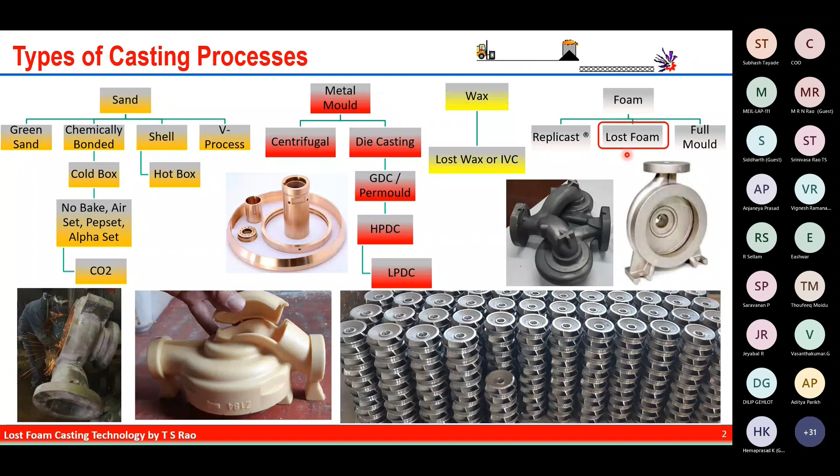Moving on to the introduction to lost foam. Actually, if you all know the investment casting process, in lost foam, the wax is replaced by the foam - that is the major difference between investment casting and lost foam technology. But one difference is in lost wax, the wax is drained and recycled, whereas the foam is evaporated. The metal in, foam out. There is a major difference between lost wax and lost foam.

It started in 1956, but in India it is early 2000s. It entered India, and there are a couple of very good foundries in India. Some of the foundries are doing very well, and they are global leaders today. These are the major steps of the lost foam casting process. The first one is the product design to the process. This is very, very important.

Unless we design the product to the process, we will not be able to achieve the desired results out of this process. Next step is the tool design and tool manufacturing, which is different from the conventional sand casting process. Third one is the casting process, tool design and manufacturing.

There are three major areas, called white area, yellow area, and black area. These are the three areas. Black area is nothing but what we have in any other foundry, but the other two are very significant to the lost foam casting process. You can see a cylinder block, a foam, and the part, which is exactly the replica.

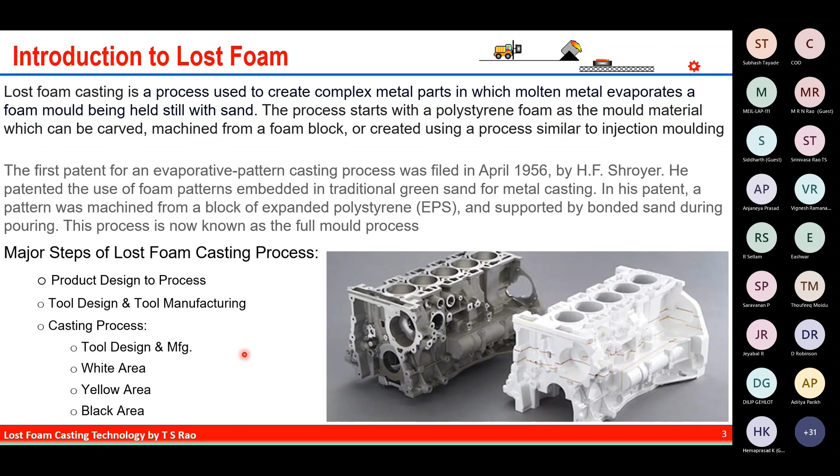Moving on to the next slide, there are various advantages of the lost foam casting process. First is the design freedom for complex multiple parts. If 2-3 parts are made today in any other casting manufacturing process, assembled after machining into sub-assemblies, those complex sub-assemblies can be made as one single casting.

No draft angles are required in this process. No multiple tools required like any other casting process - you see patterns, core boxes, breaker cores, many components. Here, only one tool is required, which is the foam mold. And there's gating flexibility - gating can be connected at the top, side, bottom, or at the center, wherever there is accessibility.

In this process, we can save cost because 100% of sand can be recycled after cooling. No resins or chemicals are required in this process. Lower tool cost because we don't have to make patterns and core boxes separately - there is only one tool required.

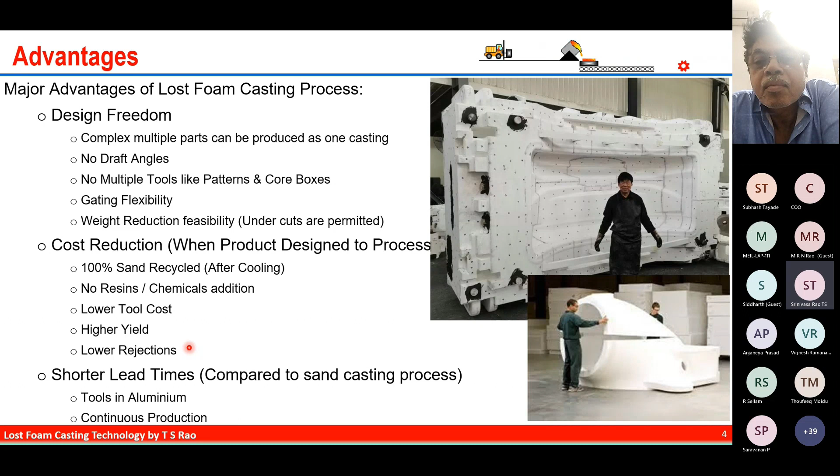Higher yield because gating can be connected at every part of the foam mold. Because of this, we get higher yield and lower rejections, because we see the replica of the casting before making it. Lead times are shorter because the tools are made in aluminum - scooping aluminum is easier than steel and iron, and continuous production can be made.

Moving on to the next slide, we can make a near net shape with weight reduction possible. We can make parts as thin as 2.5 millimeter wall thickness. We can eliminate machining wherever the tolerance is within 0.5 millimeter.

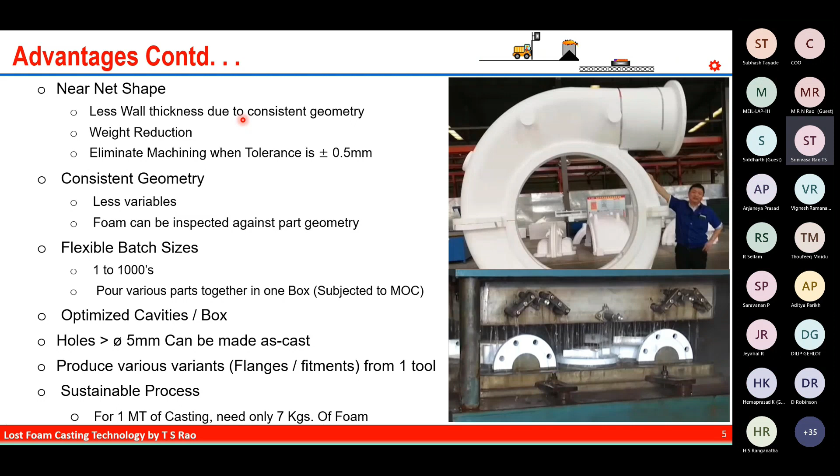The geometry is going to be very consistent, with very few variables, because all the variables we see in the casting can be seen in the foam. The foam can be corrected before we make the actual casting. The foam can even be inspected - we can take a scale and inspect it, or it can be done by CMM. Everything can be inspected before pouring.

Flexible batch sizes - we can make either one piece or we can make thousands. And various parts can be made together - in one particular mold, we can pour many parts together, subject to the material of construction being the same. Like one pump body, one pump housing, one impeller, everything can be poured together in one mold box. That is the beauty of the system.

Optimized cavities per box - as we know, it is like an investment casting tree. We can connect any number of cavities subject to the mold box size. Any casting hole over 5 millimeter diameter can be made as cast. If you see the holes in the flange in this picture, normally in conventional casting we are expected to drill these holes. The beauty of lost foam technology is everything is made as cast - even the 5mm hole can be made as cast.

We can produce various variants - normally in a pump housing there are various flanges, PN16, PN25, ANSI 125, ANSI 250. In that case, the flanges are made separately and glued. One flange variant is glued to the body, another flange variant can be glued to the same body, so that we can produce both variants together, whereby even the tool cost can be optimized.

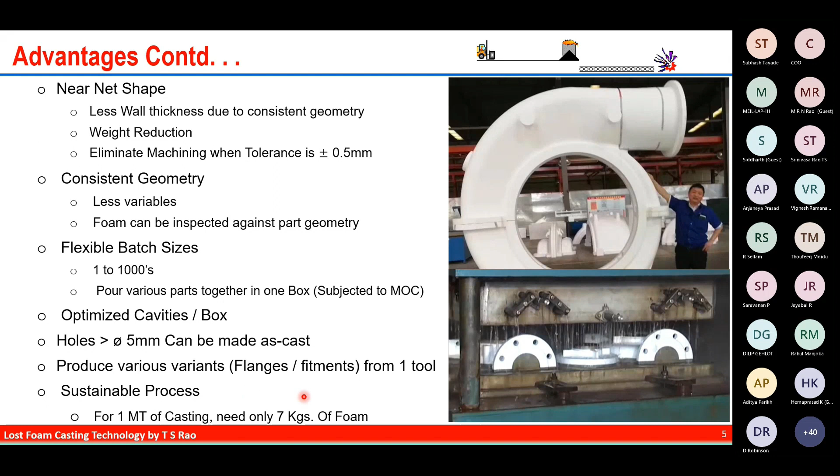It is a sustainable process with respect to the environment. And this is the beauty of the whole lost foam technology - for producing 1 metric ton of casting, we need only 7 kilograms of foam, whereas to produce an investment casting, we need a 1:1 ratio - for production of 1 metric ton of casting, we need 1 metric ton of wax. That is the delta in the lost foam casting technology.

Moving on to the next slide, the quality is going to be certainly much higher than any other casting process, because we don't use chemicals - no chemicals means no gas defects, no blowholes, no gas.

It is going to be a unique selling point. We can be a global leader if we have this technology. Tools can be transferred from other regions. Like customers say, I have a tool made suitable for lost foam technology, which is in China. I don't want to invest in a tool again. Would you like to take the tool from China and start production? So if we have the capability, we can get the tool and start production.

Unlimited tool life, unlike the sand casting process where we have a limited life, here a few million, because there is no wear and tear, there is no abrasiveness in the foam beads.

One foam, multiple metal constructions. When the foam is made for one particular product, like gray iron, where the contraction is 1%, suppose you want to make the same product in ductile iron, where the contraction allowance is 0.5%, if we know in advance what are all the various materials we are going to produce from the foam, we can have an intermediate contraction allowance, which is 0.75. Even some foundries make steel as well, and steel needs over 2% contraction. Only during the tool design stage should we know what materials we are going to cast from the same molds, the foams. That is the advantage of this process.

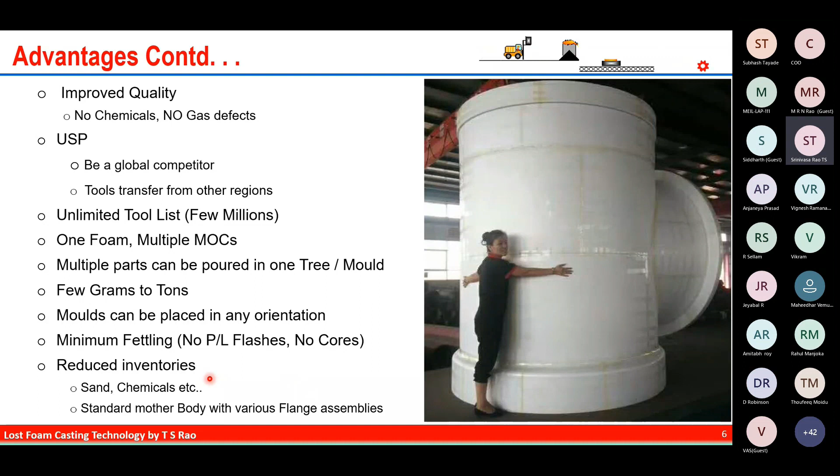Moving on to the major steps, as I explained previously, we have 3 major steps. It is called white side, which includes foam molding and gluing, and yellow side, which includes coating and drying. Black side includes molding, pouring, and post-pouring process. You can see the weight, suppose if you see the girl holding the foam, if it is a casting, it weighs not less than 500 kilograms. So that is the beauty of the system.

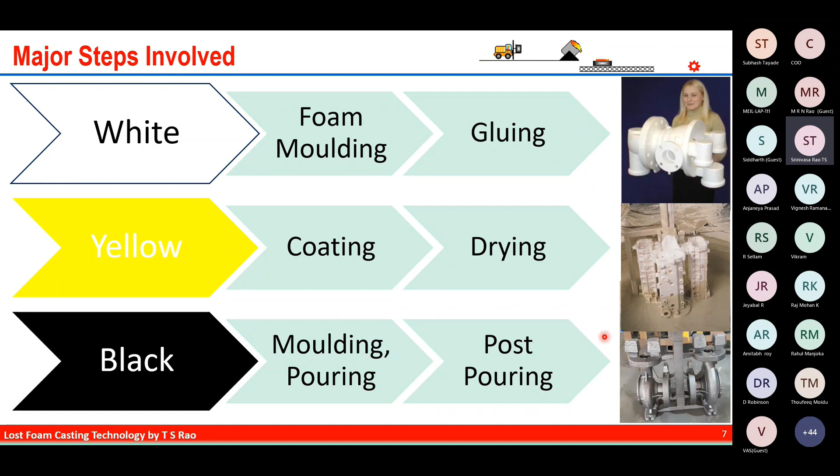Next is the dipping process and post-pouring. Post-pouring process is similar to any other casting manufacturing process.

First, start with the tool design. The tool design is very, very important in this process. There are 2 significant processes in the tool design: one is vertically parted molding machines, another is horizontally parted molding machines. I am illustrating the vertical molding machines. Tool design for lost foam is different from the conventional sand casting process. Here we need a complete shift in understanding the entire process. The tool design is similar to investment casting process, only wax replaced with foam. The tool is negative to produce a positive profile, that is why the outcome of the molding looks like a casting.

Tool design parameters: the material of construction, mostly aluminum. The tool shrinkage allowance is 0.2%. Material shrinkage, whatever various materials you intend to pour from the same foam, that shrinkage allowance also needs to be applied on the tool design. No undercuts in the tool. If undercuts are unavoidable, we need to introduce loose pieces, and slicing to be done to ensure there are no undercuts, and offset parting lines. There are punch prints, which are the locators between the fixed half and movable half, and vacuum and steam venting to be provided to the tool. Foam injection locations, water spray nozzles, uniform wall thickness for uniform heating and cooling. The tool is expected to have uniform wall thickness, unlike any other processes.

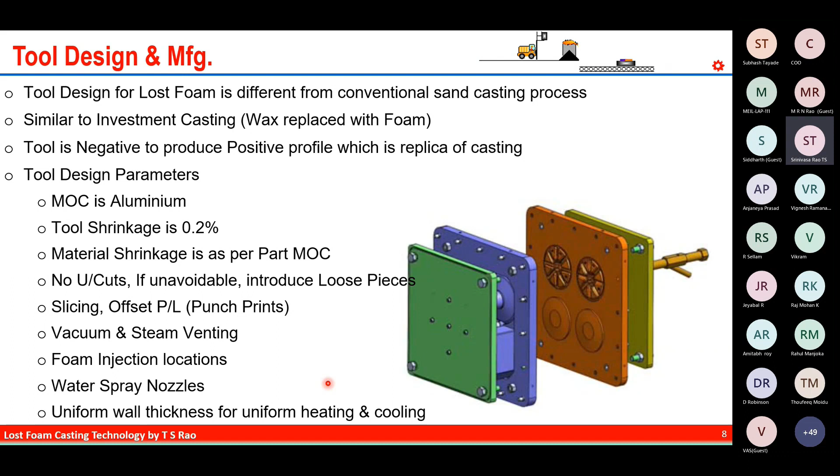Moving to the next slide, this is only for reference. Suppose you take a small pump body, it is sliced into two, slice 1 and slice 2. When you make two slices, you can closely see there is a male projection and female for locating the foams at the exact orientation, and you can see the uniform wall thickness of the tool. We have various parts in the tool, like this is a fixed half, this is a movable half, and they are locating pins and bushes. There is an insert, there is a part cavity within this. In the tool, you can have multiple cavities, different products as well.

These are the vents which are inserted mainly for passing the steam and the water. They are physical vents and they are micro vents. And you can see the gasket groove to avoid bead leakage from the parting line.

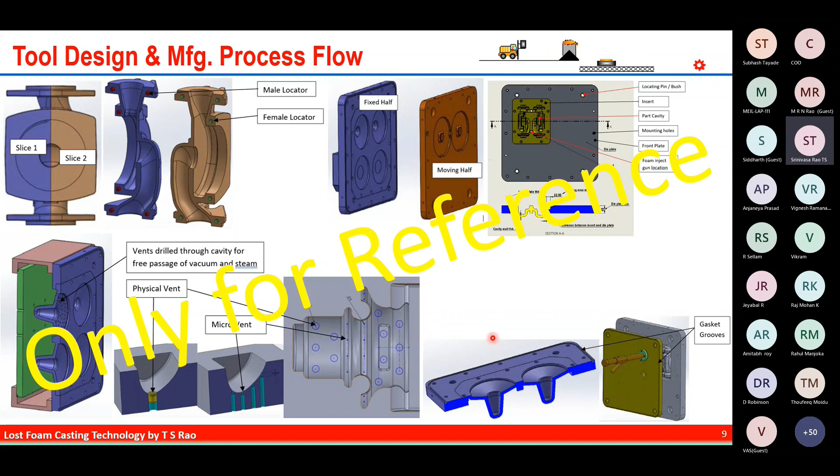Moving on to the next slide, we have pins and bushes. There is a back plate next to the tool, and this is a shooting gun which is connected, protruding towards the casting cavity. This is the design of the shooting gun. Again, it is sealed to ensure that no foam beads or steam is leaking from here.

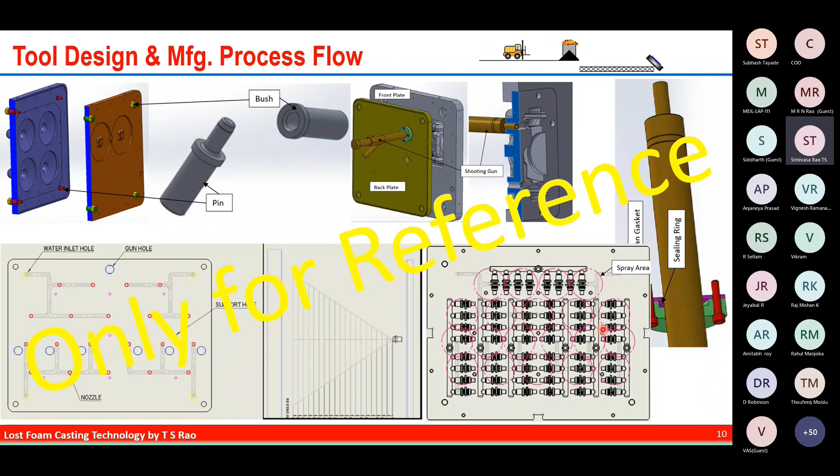This is a water inlet diagram, and if you go to the side view, you can see how water is sprayed, and this is the area. So we need to cover the entire foam cavity surface, so that is how the water injection is to be designed.

This is a typical spray nozzle, again customized to the casting cavity. This is called a steam chest, also a bolster. It will have various openings, one for the water, one for the steam, and one for the water and steam outlet. There are locating pins for fixing the tool, and again there are gaskets to prevent leakages. This is the exploded view of the entire tool.

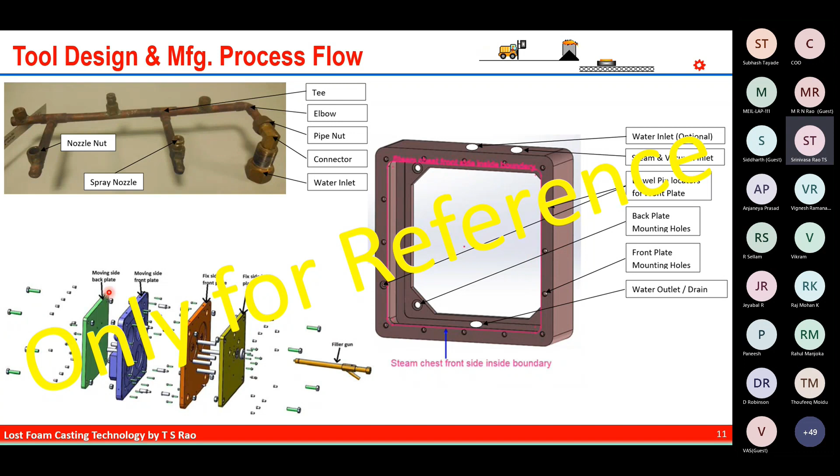Moving on to a further exploded view, two halves of the mold supported by back plates. The entire assembly is again assembled into this chest or bolster.

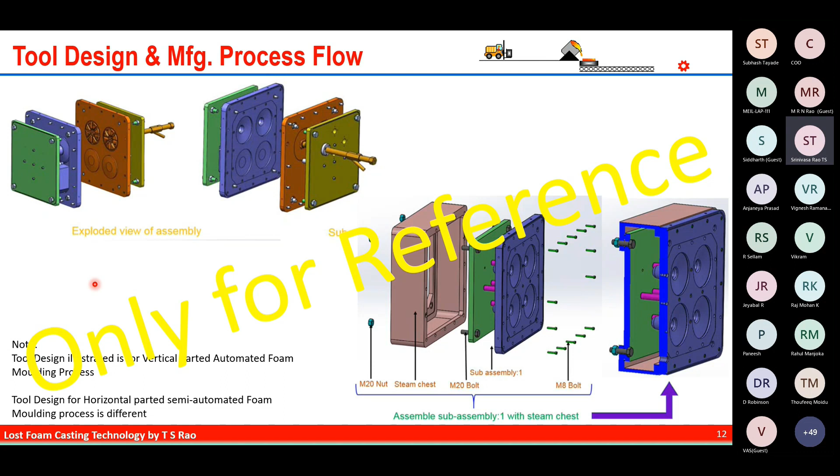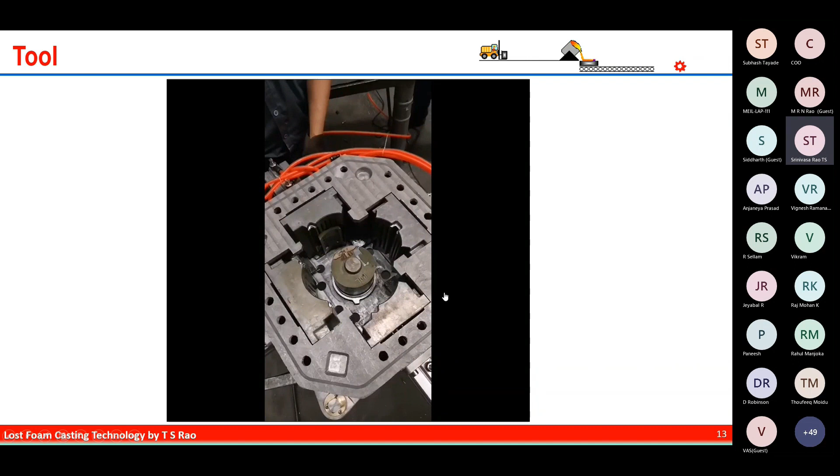As I said earlier, this is a vertical automated foam molding machine tool design, and the tool design for the horizontal is going to be different than this design. This is only for reference. Wherever there is an undercut, we can use loose pieces. And this is the simulation process.

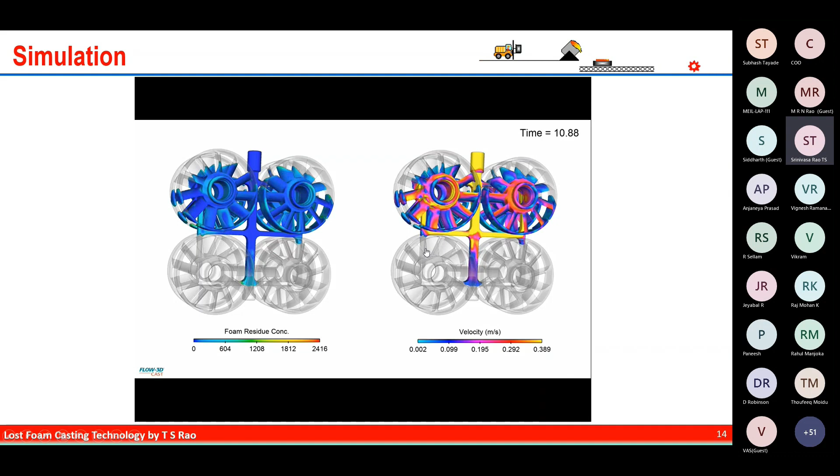I've taken Flow 3D as an example because Flow 3D did extensive research at the University of Alabama in lost foam technology. Today they seem to be the leaders in simulation for this process. So we can exactly see foam residue concentration and velocity in this process.

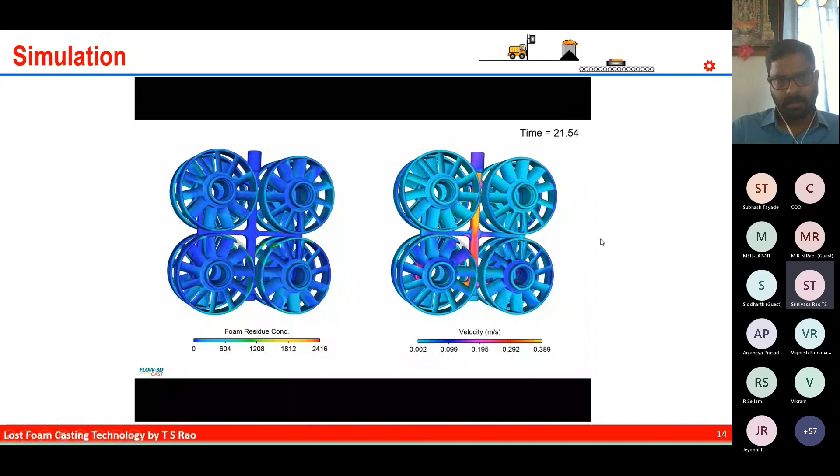The next one is the white area. White area is nothing but what looks white, the foam beads preparation. There are two significant foam beads available in the market today. The first one is EPS. The diameter of EPS varies from 0.18 to 0.8 millimeter. The carbon will be over 0.1%. It is suitable for gray iron, copper, and aluminum alloys.

Similarly, STMMA, the size is a little larger and carbon is as low as 0.06. It is suitable for ductile iron and steel. Steel again is not stainless steel, because stainless steel is sensitive to carbon. We can make carbon steels in this process.

The bead selection normally depends on the material of construction of the part. Generally 0.2 mm is used, which is like if you take a 1 liter jar, the beads weigh about 18 to 20 grams. The thumb rule is the bead size should be 1/10 of the casting wall thickness. If the wall thickness is 2 millimeters, then the bead size should be 1/10, which is 0.2 millimeter. So that is the thumb rule.

Once the beads are selected, the next process is called pre-expansion or steaming process, where the beads are taken into a boiler, a steam boiler, and steam is pumped for pre-expanding the foam beads at half bar pressure at 100 degrees centigrade. A few electrical options are also available today in the market. The bead size will increase to about 0.6. When you take 0.2 as the initial bead, after pre-expansion or steaming, the size goes to 0.6 millimeter. The cycle time again depends on the bead's quality requirement; it will vary from 8 to 15 minutes.

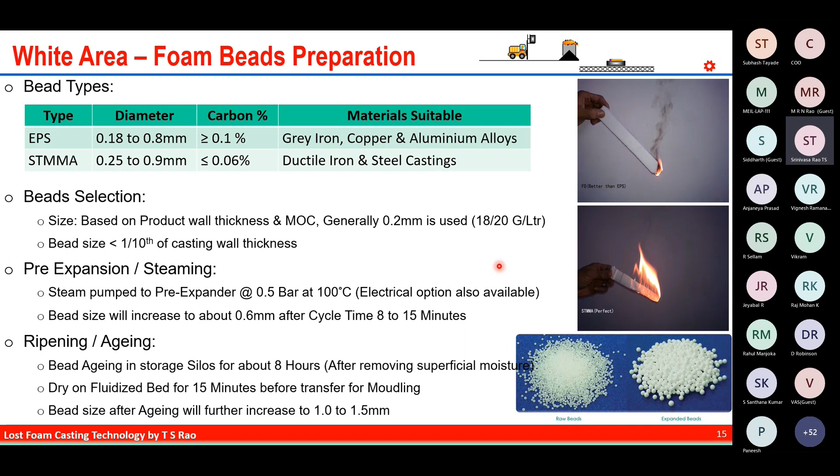The next process is foam molding. The pre-expanded foam beads are injected into the tool cavity. Once the foam beads are fully injected into the tool cavity, we need to pump steam into the tool at half bar pressure for 2 to 6 minutes, depending on the part geometry. Once steaming is over, we need to inject cold water at 1 bar pressure for 2 to 6 minutes, again depending on the part geometry.

This cold water has two advantages: one is to bring the tool back to ambient temperature, and second is promoting foam pattern ejection from the tool. After the cold water is pumped, the foam patterns are ejected from the tool, then collected by hand. Then the tool is cleaned with compressed air for the next cycle.

The wet foams are dried in a controlled environment to remove moisture. Normally the foundry has dry rooms with humidity control, ensuring the foams are completely dried before moving to the next process.

After foam molding, the next process is foam assembly. The foam patterns are assembled together to form a full pattern using glue. There are two glue options: hot glue and cold glue, both available in the market. Gluing can be done by hand, by brush, or by gluing machines.

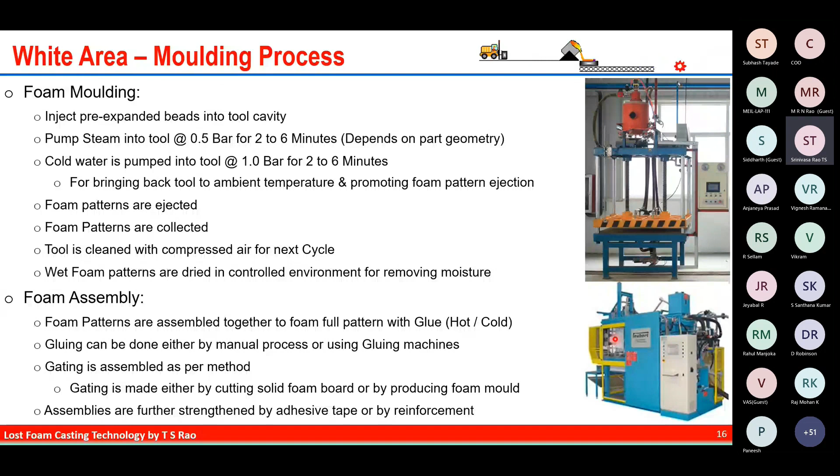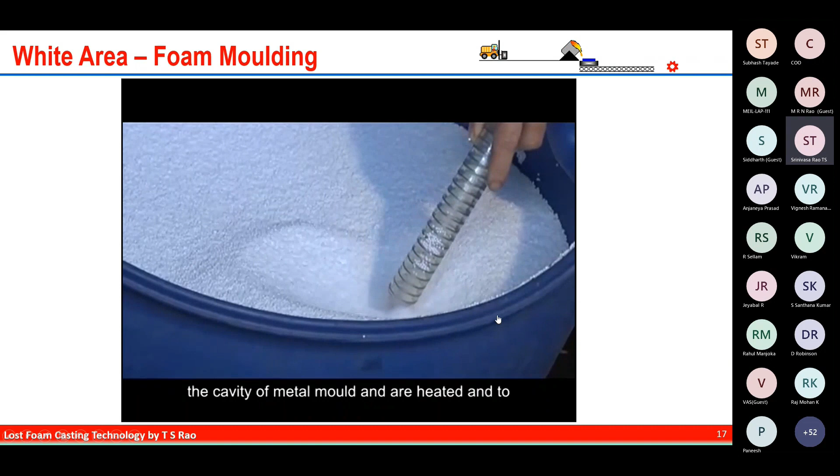Moving on to the next slide, I have a small video on foam molding. The bead will be heated and expanded again.

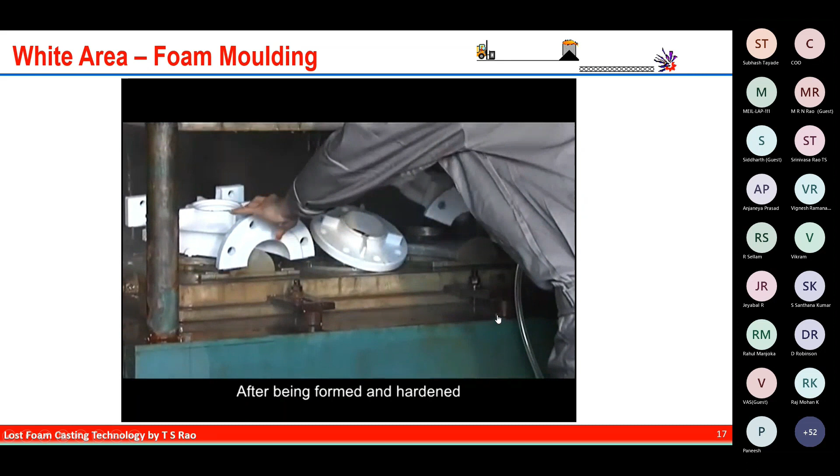The next slide is on the assembly sequence. On the top left, we can see two separate foams molded separately. Looking closely, you can see a male locator on one side and female locators on the other side.

This is a gluing gun. The gluing stick is called hot glue. We can also use cold glue at the sealing joints, and then we need to take out the excess glue. Some suppliers also apply adhesive tape.

Further on, we can see the full form of the foam casting. Then gating is assembled - you can see the runner bar, then necks, and you can see risers as well.

This is the beauty of the system. In the sand casting process, can you add a riser here? No. So this is the beauty of the lost foam technology.

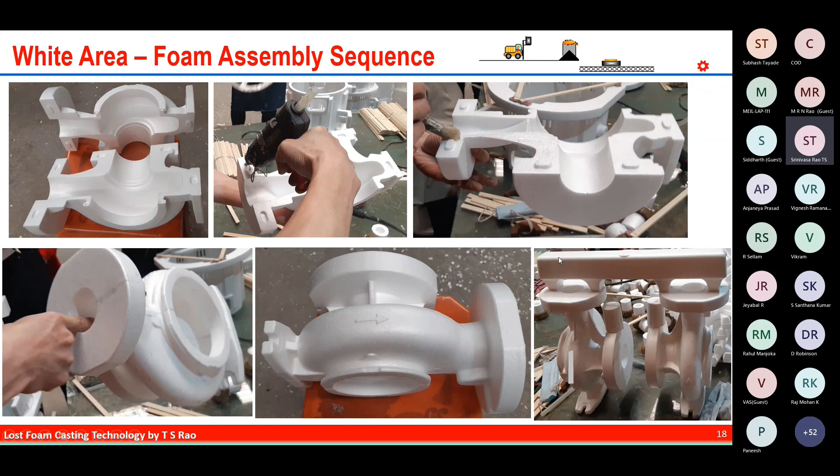Moving on to the next slide, we have a video on this process.

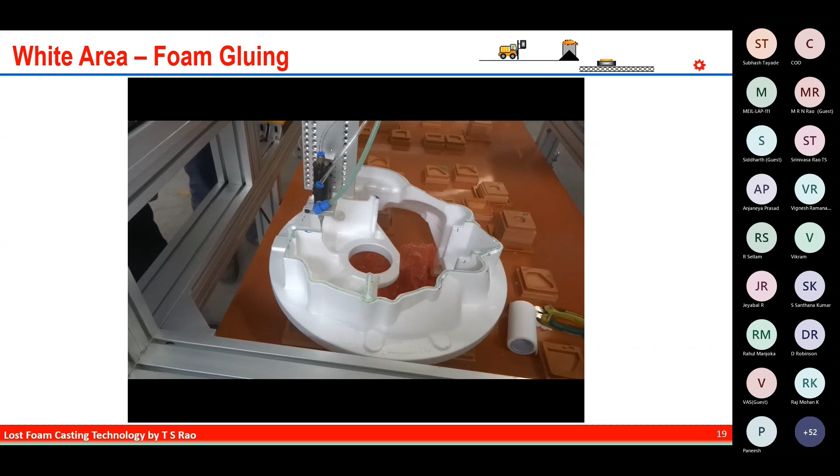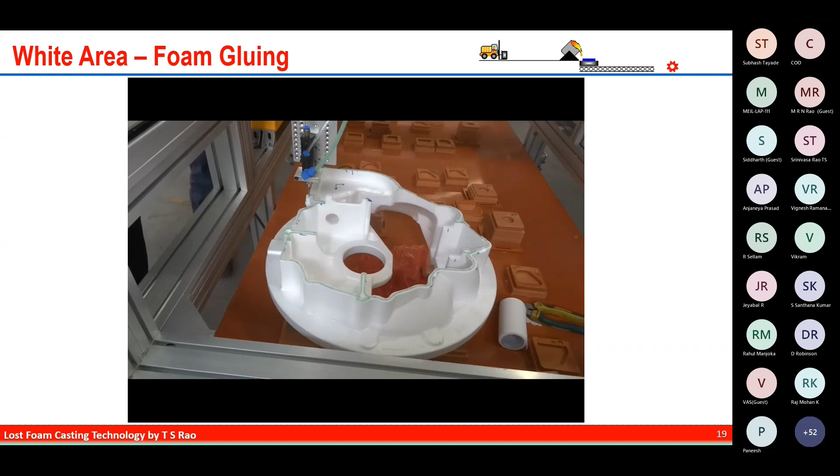So the next video is on the foam assembly.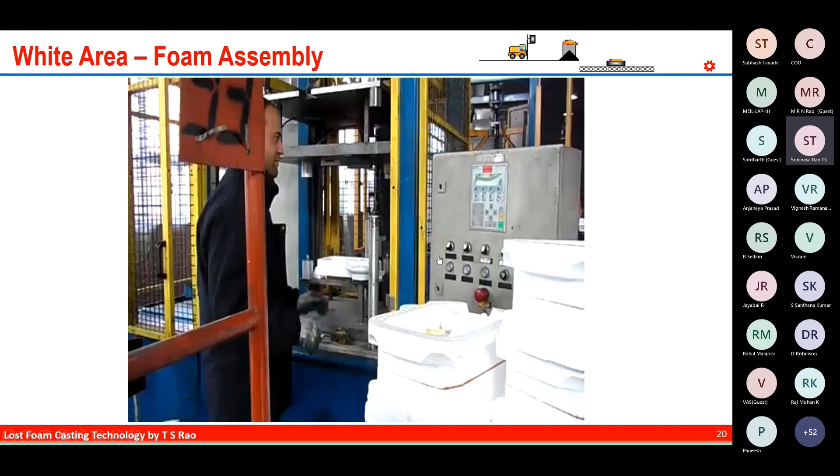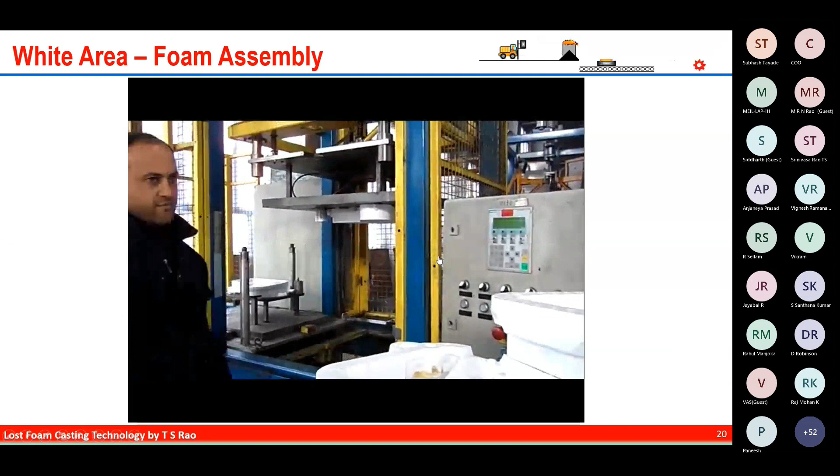It is dipped into the glue tank.

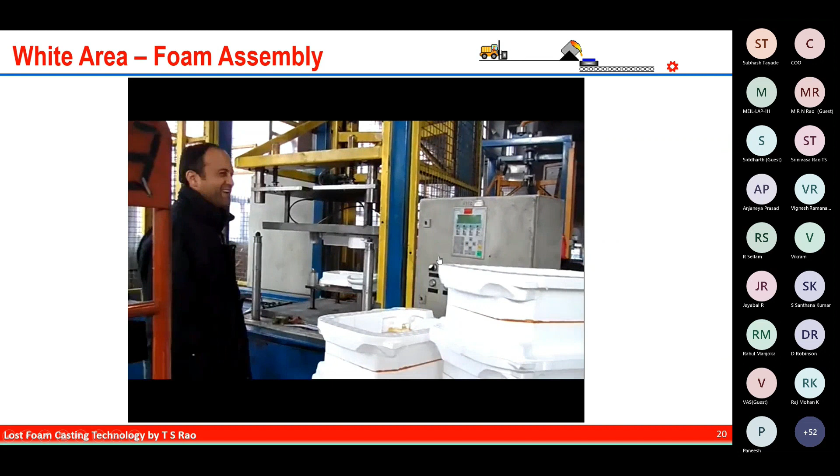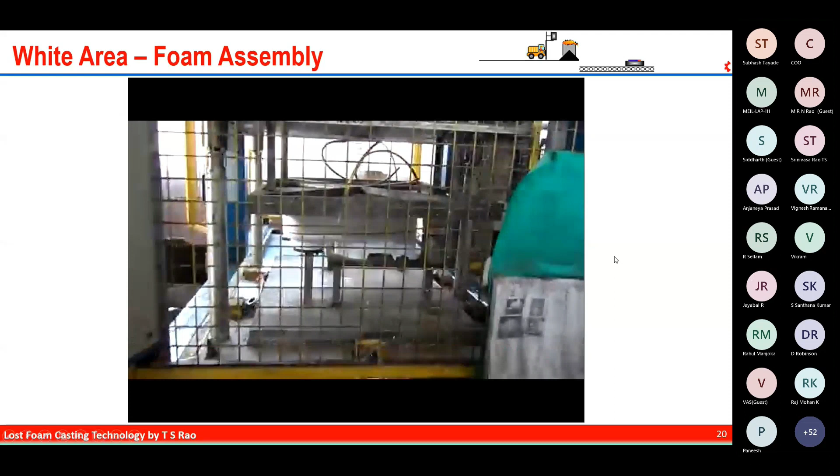Okay, next, we completed the white area with the foam assembly. Now we are in the yellow area. The yellow area is nothing but the coating. Once the foam molds are assembled with the required gating and strengthened further by adhesive tape or reinforcement, they are now coated.

If you see the coating specification, predominantly it is a water-based paint. The paint should be permeable so it is breathable, and it will act as a barrier between metal and sand, and it should be strong enough to hold the metal until it solidifies.

For coating preparation and application, mix paint with water to maintain the required Baume - about 65 to 75 - and stir continuously to avoid lump formation.

Application can be done by dipping or by brushing, or even I saw robots - robots are used for dipping the foams into the paint. Coating thickness normally varies between 1 to 2 millimeters, depending on the surface finish requirement of the casting.

In some cases, second and third coating can also be applied, depending on the surface finish and quality requirements of the casting. Coated molds then move to controlled drying rooms at controlled temperature and humidity, at 45 to 50 degrees centigrade.

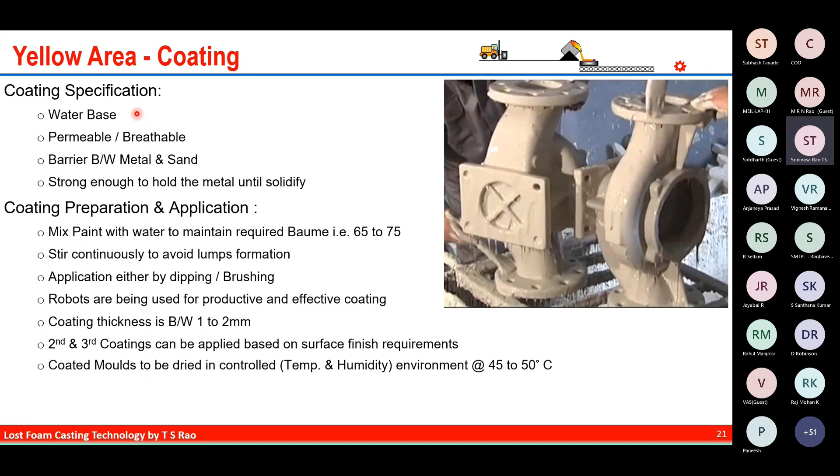After this, you can see a foundry in China with a lot of foams. These are glued and these are coated.

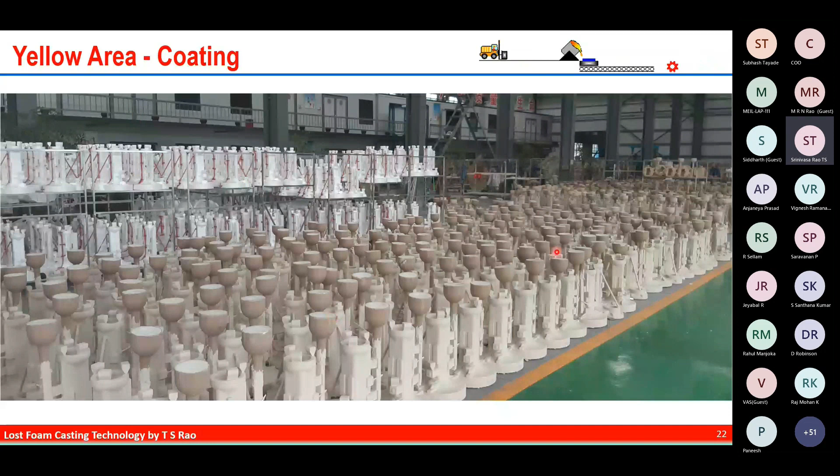Next, the black area: once the foams are made, assembled, coated, dried, and ready for metal pouring, comes the black area. The major steps are like mold box selection. We need to select the mold box which suits our part geometry.

We need to place the assembled trees into the mold box, fill sand, and compact the mold box to ensure the complete sand is packed. Then we connect the vacuum and pour liquid metal into the cavities.

The mold box design should suit the part geometry or the tree geometry, and boxes can be any shape. I have even seen round circular mold boxes.

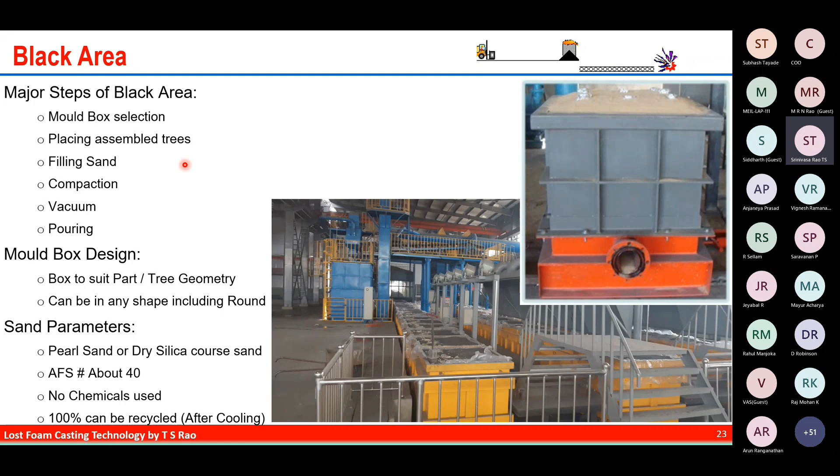For sand parameters, it can be normal dry silica sand, or pearl sand, or any sand with granules about AFS number 40. No chemicals are required to be added in the sand. 100% of the sand can be recycled after cooling and removing the fines.

Next is the molding sequence. We need to fill the mold box to about 4 to 6 inches to create a bed.

Once the assembled foams are kept on the bed, they don't necessarily need to be kept upright. They can be at 45 degrees, or in any orientation, depending on the sequential filling.

Fill the sand with shower-type sand feeders for uniform filling of the mold, ensuring no deformation of the foam patterns while sand filling.

Normally, when sand is poured into the mold box with velocity, the foams are likely to get disturbed and the position is likely to get deformed. In some foundries, I have seen them use reinforcement to ensure the foams don't shake while sand filling.

While filling the sand, vibration is switched on for 3D compaction so that the sand gets packed into the mold firmly.

Ensure the pouring cup is exposed for easy pouring. We always have to ensure that the pouring cup is exposed for pouring, then move the filled boxes towards the pouring area.

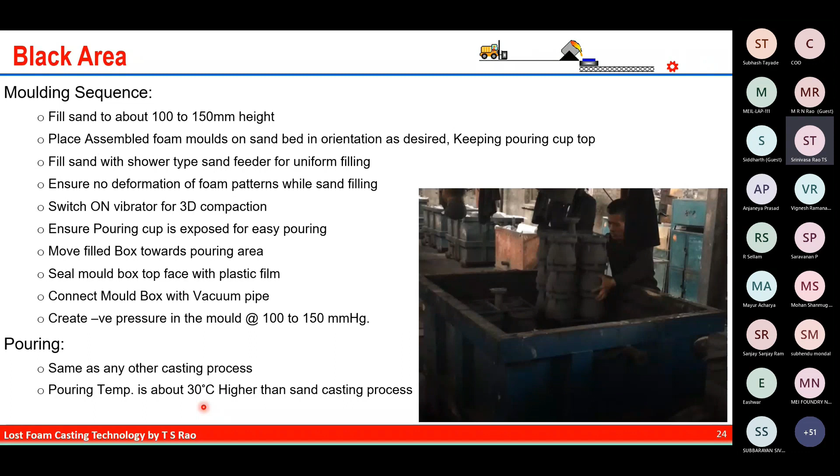Pouring is the same as any other casting process, but the pouring temperature has to be about 30 degrees higher than sand casting, because the metal is expected to burn the foam. I have a few videos on this.

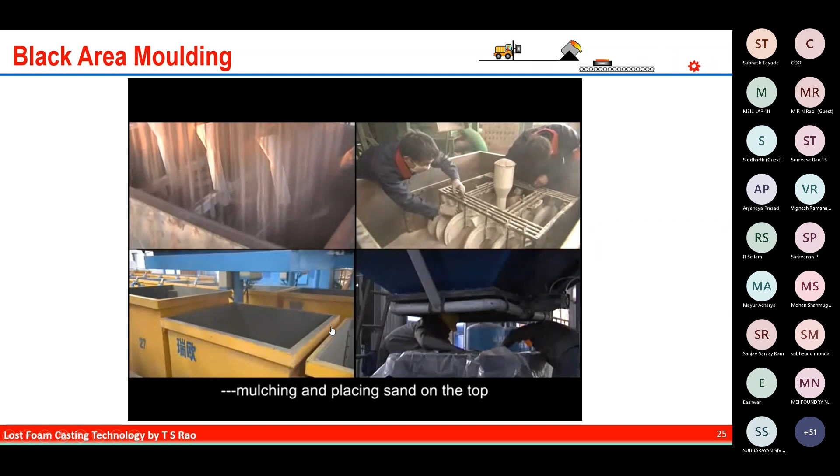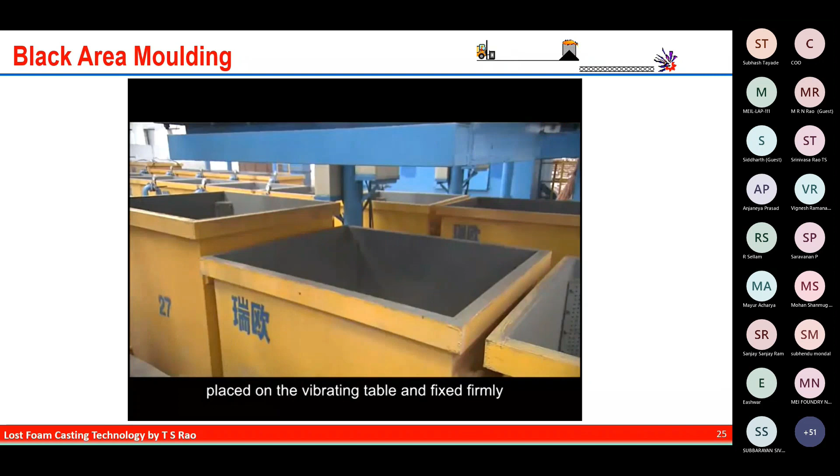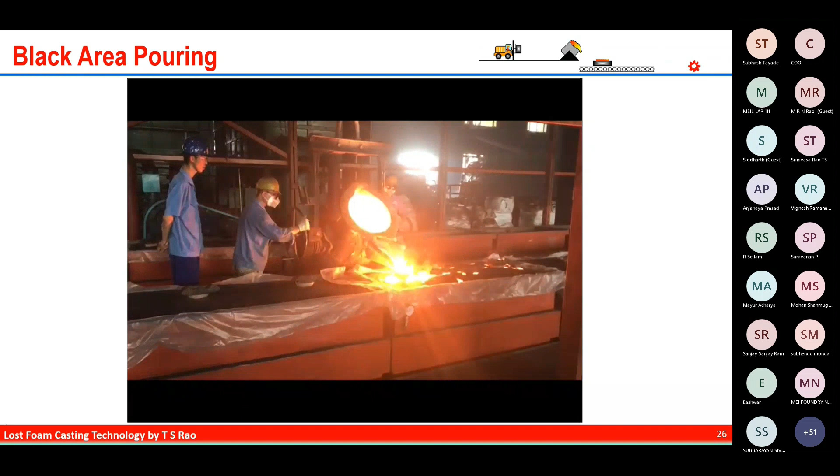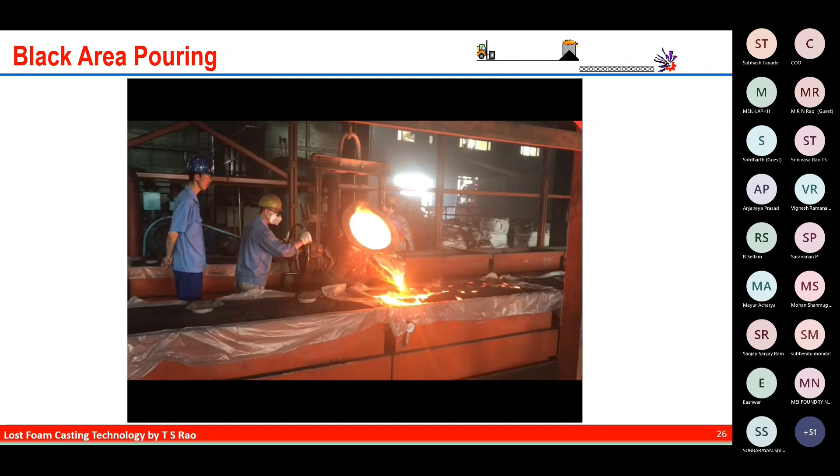Next is the pouring, which looks like any other pouring process. Next is the filling.

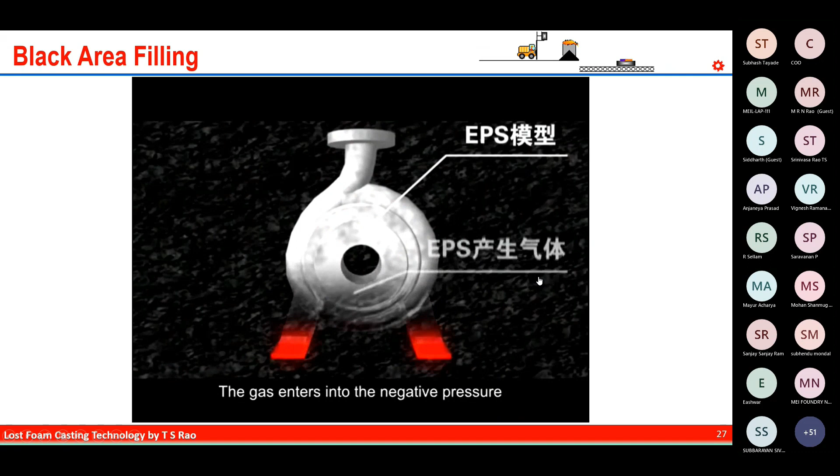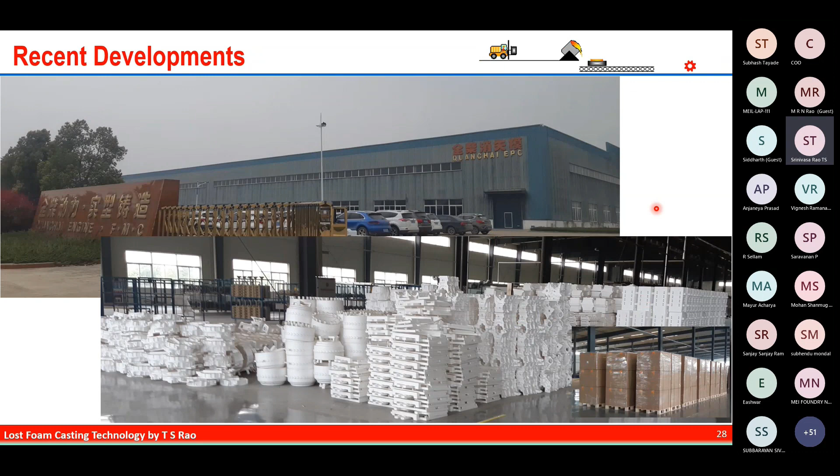For recent developments, there is a supplier called Quanchai EPC, a Chinese government company. They produce foams - you can see a lot of cylinder blocks being sent to General Motors US for pouring. They make the foams, assemble the foams, assemble the gating, pack, and export to the US for pouring. This is a recent development happening in China.

Looking at the environmental effect of the process, EPS contains about 92% carbon and STMMA contains about 60% carbon. Because of this, when you pour hot metal into the foam molds, carbon monoxide is generated, and we need to collect it carefully. We need to collect the fumes and isolate them by passing through wet scrubbers. Overall, the impact on the environment is less compared to any other foundry process.

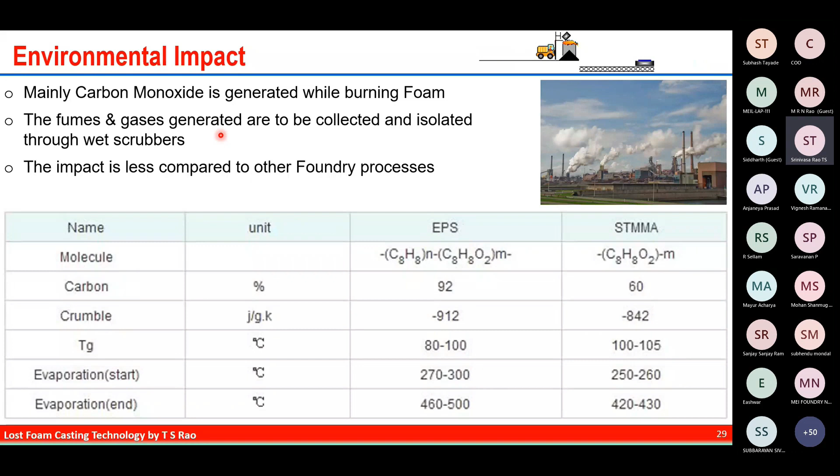Moving on to the next slide is the challenges experienced in India, because we're all in India. So these are the facts. It is my opinion, it may differ depending on the people. It is not very popular in India, unlike China.

Few foundries failed in establishing commercial production initially when we started the lost foam technology during the early 2000s. Adequate research is not done on simulation. Not many equipment suppliers can provide a complete solution.

I have seen there are raw material suppliers, there are equipment suppliers, but we need suppliers who can provide 360 degree support for the foundries. There are also inadequate optimum tool designers or tool makers in India.

Coming to raw materials, quality beads and quality coatings are expected to be imported either from the US or China. Another challenge is minimum order quantity, because we cannot buy 100 kilograms, we need to buy a container. Again, storage is a concern.

Coming to manpower, it's a big challenge today. The required competence is different, a totally different mindset of people needed to handle the lost foam process. Due to very few foundries in India, hiring trained manpower is a challenge. And if you train a fresh engineer, there is no guarantee they stay with us - there is a flight risk.

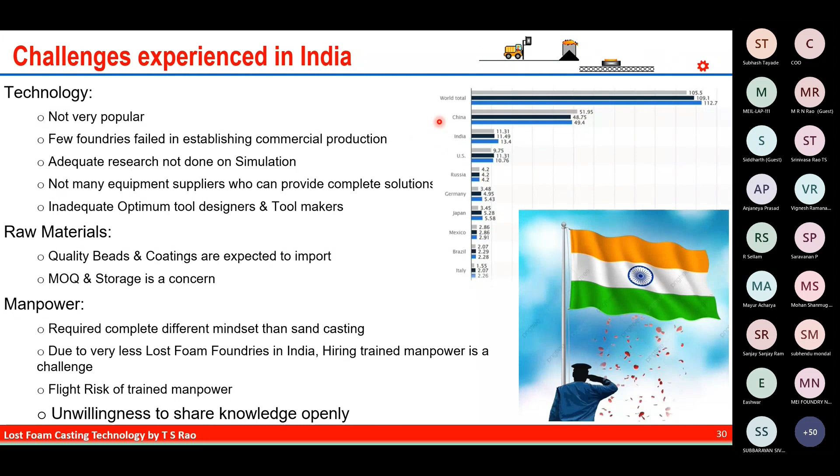Downside of the lost foam casting process. Like any other process, there are negative sides of this process as well. Particularly when you look into the commercials, customers normally say, I'll pay you by kilograms, whatever the process you use I don't mind, not by the product.

And the trained resources, we have to pay a premium. Again, we need to import raw material. If you closely see the profiles, very small profiles, even the undercuts in the flanges are made in this process - that is the beauty of this.

And unless we do the VAVE or change the design, it will not be economical. We need to do a lot of R&D as well.

When you come to quality, stainless steel production due to carbon content is a challenge. Only EPS Elite, a company in Canada, started making low carbon beads, and they seem to be successful in this process.

You can see carbon defects in the cast surface. If you closely look, you can see grains. They are likely to leak water during hydro test due to the porosity - you can see the defects.

This is a copper alloy casting made through lost foam technology, and you can see the vent marks as well. If you don't properly dress it, we end up with vent marks on the cast surface. Foam beads and molds have to be kept safe, otherwise they are likely to catch fire.

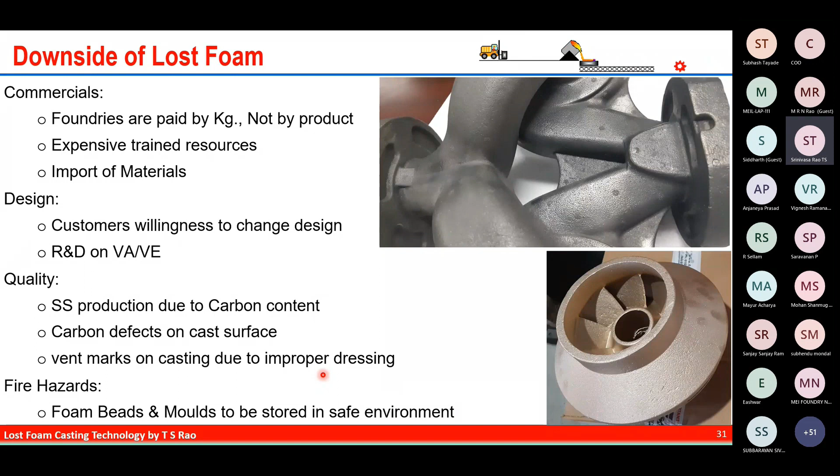These are the references, or I would say the disclaimer - all the information I have shared with the foundry fraternity today is based on my previous employment in this technology. I did a lot of R&D, almost 10 years I spent time in lost foam technology.

I'm lucky to work with peers in the industry - you can see Marshall Miller, Kevin, Melissa from EPS Allied, and Gopeng, who is very popular in India today. I'm the only person from India to join the American Foundry Society Lost Foam Council.

I visited many suppliers and customers in this technology, and collected some information from open source or the internet, as explained in the AFS Lost Foam Council. I visited many foundries in China, maybe about 20 foundries, as well as in Canada, US, and Mexico. This is all my limited exposure in this process.

I'm sure the experts in this August forum are certainly more knowledgeable than me. You have to excuse me if I am wrong anywhere in this process or presentation.

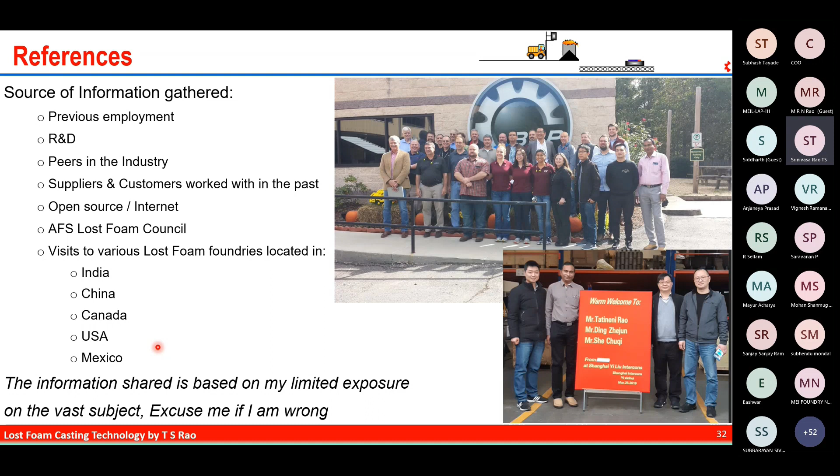Thank you very much, sir. Thank you for a very interesting presentation.

There is also one more question - which water for cooling is reusable, and what is the percentage of water consumption? Water doesn't have any role other than cooling the die. We can use any water, but it should be cold. The purpose of the water is only to bring down the temperature to ambient temperature. There is no other purpose of the water.

Is the surface of the die smooth or rough for heat transfer? The surface of the die is much smoother.

Mr. Rao, hello. Yes. This is Sangram Tade from Alpha Dice. Sir, we just require some guidance with respect to venting.

What is the importance of venting? What kind of vents are used? And afterwards, whatever dressing is required in the vents - how do you take care of that?

The venting is like the venting we use in the cold box process - brass vents, similar vents, but various designs of vents are available in the market. The purpose of venting is to pass the steam. We need to cover the entire surface of the mold. The purpose of the vent is also not to let water penetrate into the mold cavity, so design of the vent for water penetration is important.